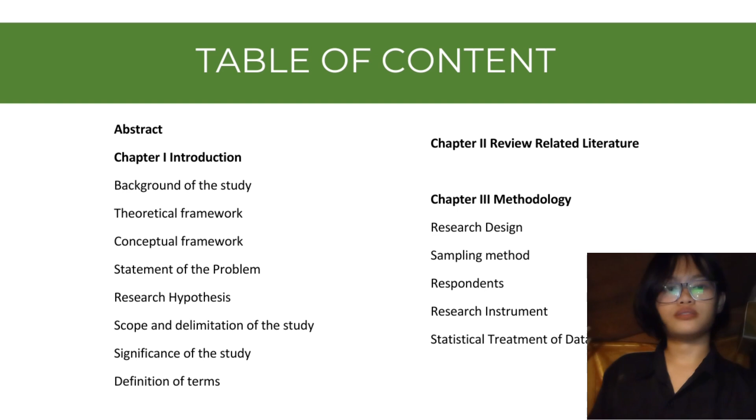And I would like to continue with our abstract. Construction environments are inherently hazardous, with risks stemming from heavy machinery, working at heights, and exposure to various materials. Despite advancements in safety technology and protocols, accidents still occur, leading to injuries, financial losses, and project delays.

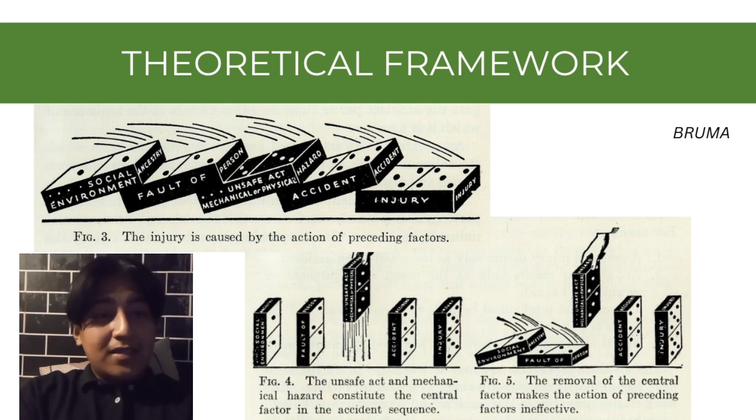The domino theory has been a long-standing and widely accepted model in occupational safety, including construction. Its simplicity and practicality make it easy to apply in various settings. The theory can be used to analyze and address a variety of hazards such as falls from heights, electrical shocks, and equipment failures. It can improve the development of safety policies, training programs, and hazard identification and control measures.

For our conceptual framework, we use the Safety Management System or SMS as a framework. The framework displays the relationship between the essential components of SMS and their effects on workplace safety results. It emphasizes the importance of management commitment, hazard identification, risk assessment, and personnel training and constant improvement.

Let me explain each. First, safety observation. This serves as the foundation of the SMS. It involves identifying and assessing potential hazards and risks within the workplace. This observation can be conducted through regular inspections, audits, and employee feedback.

Next is management components. These sections highlight the essential elements that need to be in place for effective safety management. These include workplace environment, safety policies and regulation, safety training and education, management commitment, and worker behavior and attitudes.

Next is risk assessment. This process involves evaluating the potential risk associated with identified hazards and determining the likelihood and severity of accidents or injuries. This information is crucial for prioritizing safety measures and allocating resources effectively.

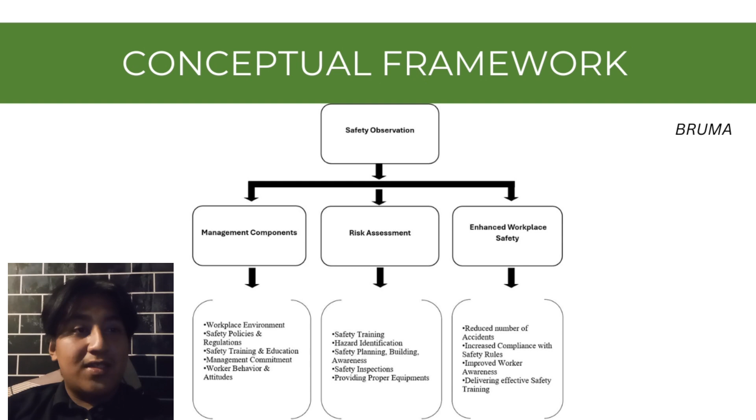Statement of the problem. This study aims to explore effective strategies for enhancing construction site safety, ensuring that workers can operate in a secure environment while maintaining productivity.

The first question is, what challenges do the employees face in implementing and enforcing safety protocols? This question focuses on understanding the barriers that workers experience when trying to follow or apply safety protocols on the construction site. This question is important because identifying these challenges can help in designing solutions that make safety protocols more practical and easier to enforce.

Second question. Does the existing safety training program influence workers' awareness regarding site safety? This question explores the effectiveness of current safety training programs in raising awareness about safety issues. It assesses whether workers are genuinely more conscious of risk after training or if the program needs improvement to be more impactful.

Third question, what practices can be implemented to further enhance safety protocols at construction sites? This question looks at potential new strategies or methods that could improve safety. By considering new practices, companies can proactively enhance their safety measures rather than waiting for accidents to reveal gaps.

The hypothesis suggested that improving safety training programs, enforcing safety protocols more strictly, and adopting innovative technologies will significantly reduce accidents and injuries on construction sites at Prime Pacific Marine and Industrial Services Corporation.

Enhanced training equips workers to recognize hazards, respond effectively, fostering a culture of safety. Stricter enforcement ensures adherence to safety rules, minimizing negligence. Furthermore, innovative technologies such as wearable devices and drones enhance monitoring and hazard identification. Together, these strategies create a safer work environment, leading to better outcomes for both employees and the organization.

Scope and delimitation. The focus of this research pertains to the employees of Prime Pacific Marine and Industrial Services Corporation with the objective of improving the company's safety standards. This means identifying areas where safety practices could be improved, understanding existing gaps, and proposing solutions to minimize accidents, injuries, and other safety-related issues at the company.

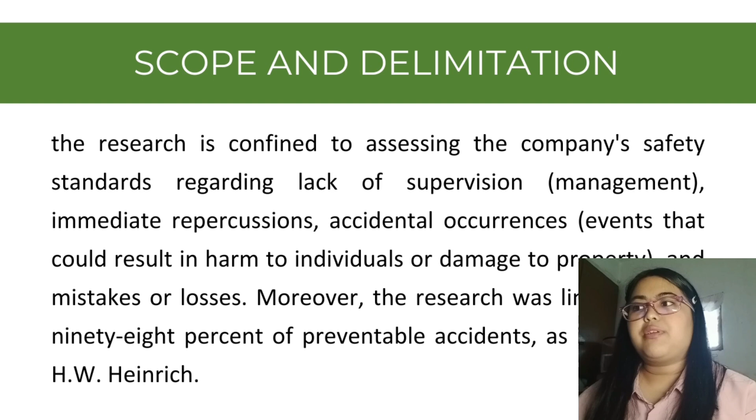In addition, the research is confined to assessing the company's safety standards regarding lack of supervision or management. This refers to situations where management may not be adequately monitoring or enforcing safety protocols. If management are not ensuring that safety measures are followed, it can increase the likelihood of accidents. Next is immediate repercussions. This involves assessing how quickly and effectively the company responds to safety violations or accidents.

Then, accidental occurrences, events that could result in harm to individuals or damage to property. The research will focus on understanding how such events are handled and what could be done to reduce their frequency. And mistakes or losses. This looks at errors or losses whether due to human error, mechanical failure, or inadequate safety protocols and assesses how this can be minimized.

Moreover, the research was limited to the 98% of preventable accidents, as indicated by H.W. Heinrich, which suggests that most accidents are caused by unsafe acts or conditions and are preventable.

Definitions of terms. First is construction site. Refers to the physical locations where the construction activities of Prime Pacific Marine and Industrial Services Corporation are conducted. This site consists of various elements such as materials, equipment, and workers that work together to achieve construction projects. By studying site conditions, procedures, and safety protocols, the evaluation aims to identify and improve safety aspects to prevent accidents and hazards.

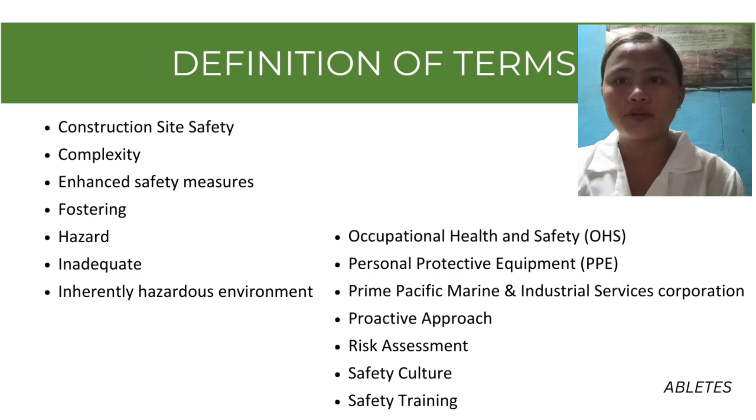Last of the definitions of terms is safety training. Safety training is educational programs designed to inform employees about safety protocols and emergency procedures essential for ensuring a safe working environment at Prime Pacific Marine and Industrial Services Corporation.

Prime Pacific Marine and Industrial Services Corporation can benefit from learning from the experiences of construction companies worldwide. This research review explores international research on construction site safety to identify the effective strategies and interventions that have proven successful in other contexts. The construction industry faces a significant challenge with a high rate of industrial injuries and fatalities, making it a high-risk field.

To improve industry safety, it is also important to determine the motivating elements that affect the SMS efficacy and quality. In order to reduce risk and enhance safety results in the construction industry, YU's research emphasizes the vital necessity for strong safety protocols and techniques based on data.

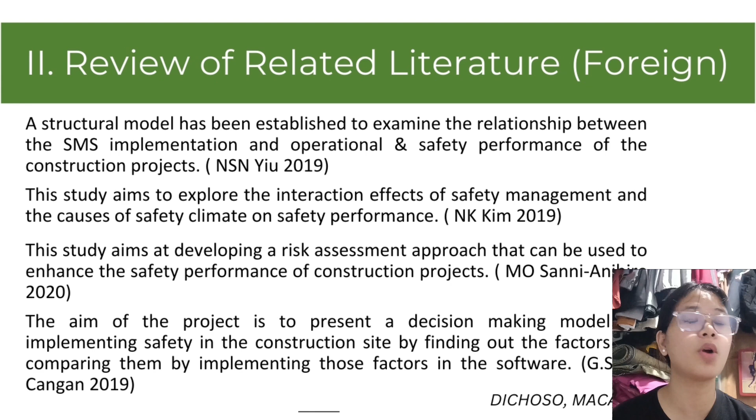In order to point out the proactive aspects of safety precautions, the language defines safety as being guarded from damage or unfavorable outcomes. Through the identification of accident causes and the development of safety precautions, the project is trying to assess construction site safety and highlight the significance of a proactive approach to safety in the construction sector.

Based on the local study from Dexter M. Toyado's study, Health and Safety in the Construction Industry in Catanduanes, Philippines. This research focuses on the use of mandates of the Department of Labor and Employment in regards to safety and health training programs for workers in the construction industry. However, the concern of the incident still persists.

In simple terms, this study shows how essential the construction industry is for building everything from homes to major infrastructures like roads and bridges. It clarifies that building does not only mean erecting structures, but also creating employment and room for expansion. This aids in our research as it shows that enhancing safety measures on the construction sites protects the workers and the economy as well.

Doing rehabilitative corrective work on a construction site allows for fewer accidents, meaning the project will be finished early at a lower cost. This focuses on safety and therefore is directed towards these concerns of enhancing productivity and economic research, justifying the relevance and importance of this study.

This study, titled Quantitative Analysis and Correlation Between Safety Perception and Worker Performance of Construction Workers in Pampanga, Philippines, by John Vincent G. Tongol, Ridolf P. Palma, Renzo L. Tala, Rick Donald S. Manzon, and Estrelita L. Bernardo, looks into the influence of safety awareness on the performance of construction workers.

It shows that when workers become more aware of the risks surrounding them at the construction site, their performance level tends to go down as they become more careful not to cause accidents. However, the same workforce performs better when they are assured that all safety measures are in place. This means that the implementation of the safety measures is not enough because they should be active for workers to be productive.

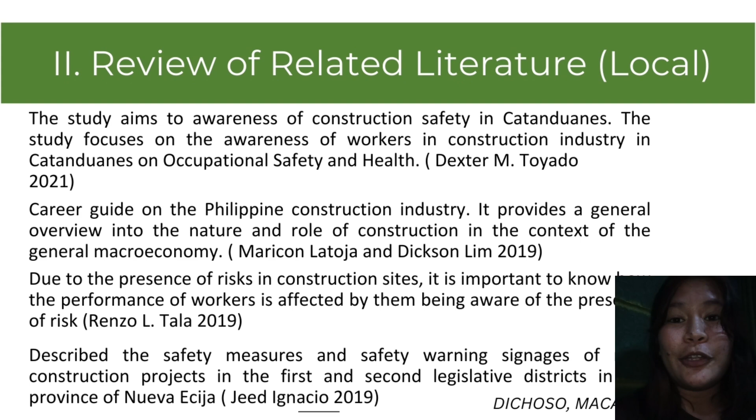Based on the local study from Jasten Keneth D. Treceñe, Causes of Accidents in Construction of Shopping Mall in Tacloban City: A Multiple Causation Approach. This research says that accidents happen because of a few different things. First, it's important to make sure workers know how to do their job safely. They need to be trained properly and understand the risks involved. It's also important to have good safety plans in place, like what to do in case of an emergency. And of course, workers need to wear the right safety gear, like helmets and gloves, to protect themselves.

But it's not just about the workers. Sometimes accidents happen because of things like poor supervision, using the wrong tools or materials, or even having a weak foundation for a building. So we need to look at the whole picture and make sure everything is done right to keep everyone safe. This research provides a roadmap for developing a comprehensive safety program that goes beyond just enforcing rules.

We need to ensure workers are properly trained, safety plans are in place, and the right tools and materials are being used. By addressing these multiple factors, we can create a safer work environment at Prime Pacific Marine and Industrial Services Corporation, ultimately contributing to a culture of safety where everyone feels responsible for their own well-being and the well-being of others.

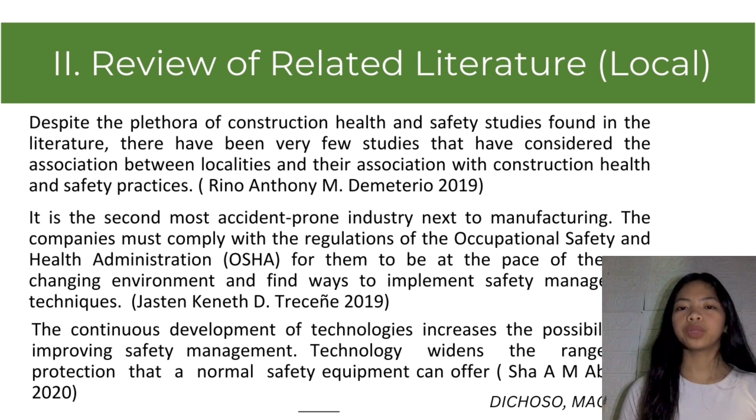Research design. Our study aims to explore how the safety practices are implemented on construction sites and how effective they are. To achieve this, we use a quantitative approach by conducting surveys with construction workers. By asking structured questions, we were able to collect data that help us identify patterns in their attitudes and behaviors toward safety protocols. Our goal was to use this insight to understand the current safety culture and find ways to improve it.

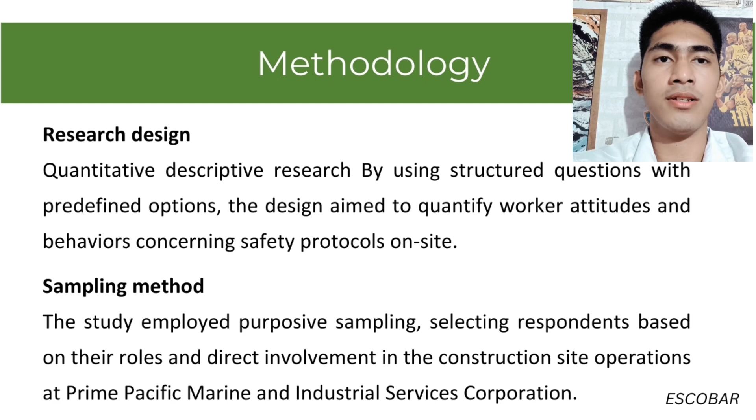Sampling method. In this study, we will use a purposive sampling method. This means we will select people who play important roles at the construction site, such as the engineers, timekeepers, and those involved in safety practices. The goal is to get specific insight from those who are directly involved or responsible for safety on site. Due to time and access limitations, we will limit our study to 10 participants from Prime Pacific Marine and Industrial Services Corporation.

The respondents consisted of 10 individuals. The respondents are construction workers, each holding key roles in construction site operation. These roles include engineers, timekeepers, welders, foremen, masons, carpenters, and fitters. Each respondent contributes unique insight based on their experience, helping to identify current safety challenges and potential improvements in protocols.

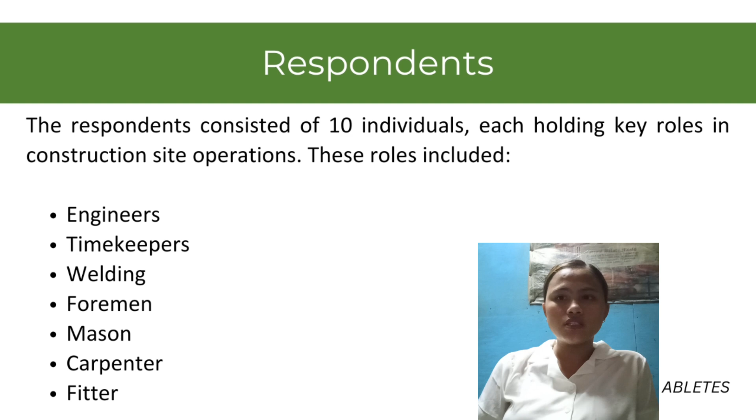Good day everyone, I'm Angelica Mei Servito and now I'm going to explain our research instrument used in our construction site safety study. The primary instrument used in this research was a Google Form questionnaire, which includes 4 questions that give information and gather valuable insights from industry professionals.

So as we explore the world of construction site safety, it becomes evident that understanding the perception and attitude of industry professionals is important. To achieve this, our research used a Google Form questionnaire as the primary instrument. This innovative approach enabled us to gather valuable insights from multiple respondents. We focus on gathering general information about the respondents. This data allows us to contextualize the responses, and we invite them to share their opinions on critical aspects or honest thoughts so that we gain a deeper understanding of industry safety cultures.

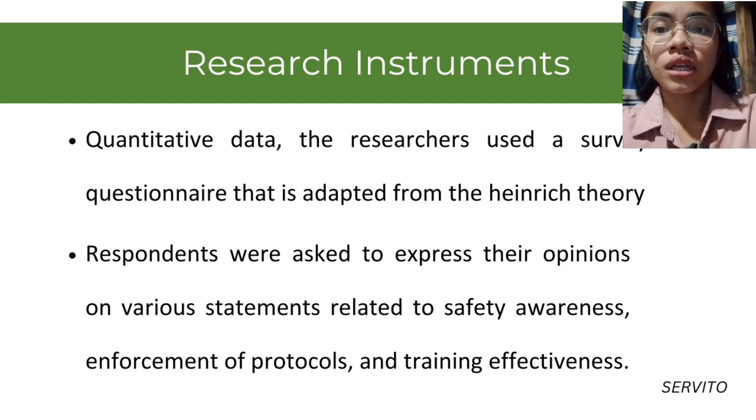Our goal is to contribute meaningfully to the enhancement of construction site safety practices by analyzing responses collected through our questionnaire. We aim to identify both strengths and weaknesses within the current safety protocols. Our findings are intended to inform recommendations that can lead to improved safety outcomes on construction sites.

Statistical treatment of data. The data collected from Google Forms was exported into a spreadsheet for analysis. Descriptive statistics such as frequency, counts, and percentage were used to summarize the data. Given the sample size of 10 respondents, statistical analysis focused on identifying patterns and trends within the responses from carpenters, fitters, masons, engineers, timekeepers, welders, and foremen. Using a spreadsheet, we analyzed the answers to each question, ensuring the accuracy of the results.

As we explore and understand the perception of construction site safety, we gathered valuable insights from 10 respondents representing their roles. Our journey began by exporting the Google Forms data into a spreadsheet. By engaging in a data-driven approach, we have successfully captured the collective voice of industry professionals. Our findings bear the potential to significantly influence construction site safety, preparing for a culture characterized by responsibility and mutual respect. Our statistical treatment of data was a methodological and insightful process.

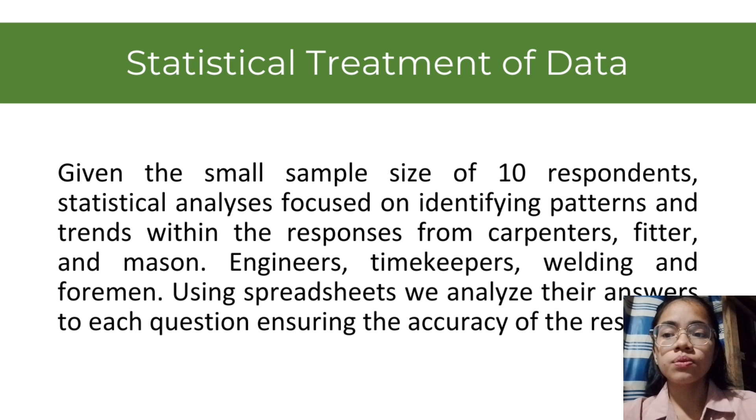We have various patterns, trends, and insights, importantly lending a voice to the experts who are shaping the future of the construction industry. It is through this conversation and analysis that we hope to foster an environment that emphasizes safety, accountability, and continuous improvement in construction practices.